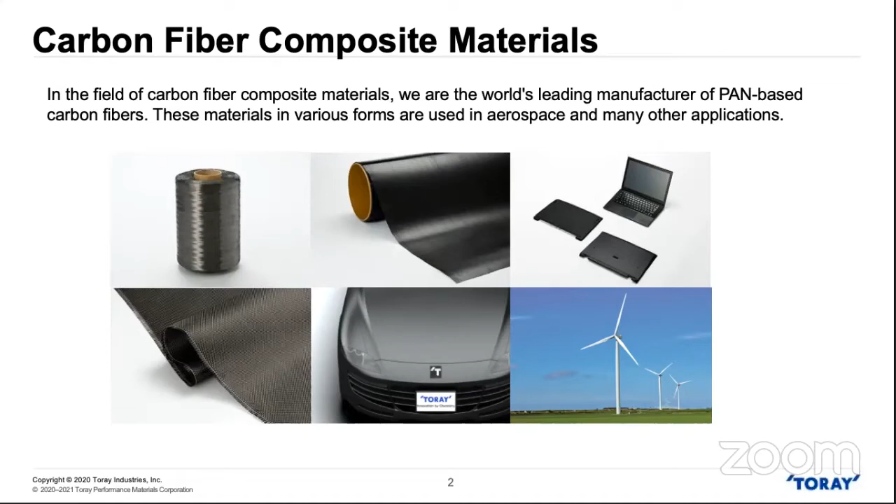So what exactly is carbon fiber in a composite? To understand our materials, we first have to understand this concept. Webster's dictionary has defined a composite as a solid material composed of two or more substances having different physical characteristics, in which each substance retains its identity while contributing desirable properties to the whole.

Composites can be found in many areas of our life: aerospace, athletic equipment, vehicles, motorsports, boats, military, high-end tech, construction, medical, I could go on and on. Composites are used to reduce weight because there's a high strength to weight ratio compared to homogeneous materials. One example would be an aircraft where fuel savings of up to 20% can be achieved with 50% of the aircraft being made from composite materials.

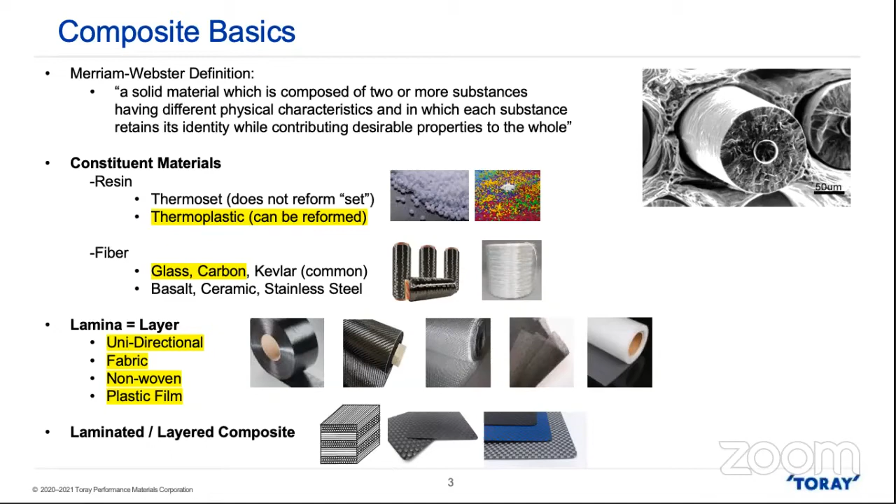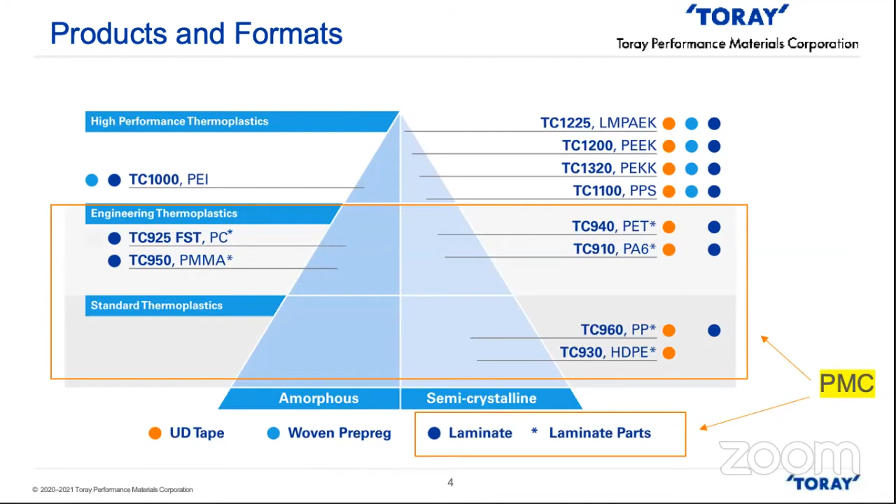When we talk about these engineered thermoplastics, keep in mind we can create a hybrid of materials by combining the woven layers with the UD layers, as the polymers are compatible, while giving the benefit of the UD efficiency, it offers the woven cosmetic so many of our customers desire.

Here's a deeper dive into the polymers our division works with day in and day out. We offer these polymers in a number of carbon and glass options, as well as the hybrid options discussed on the last slide. With both woven carbon fiber and glass and unidirectional carbon fiber and glass, we're able to really blanket the entire world of industrial applications, encroaching upon those more highly engineered projects.

The first one at the very top is the TC910, which is a nylon 6. We use this for battery covers, seat structural reinforcement, and the reinforcement of parts are compatible with typical polymers used, so it's easy to injection over mold for a mechanical bond.

The second one is our TC925, which is a polycarbonate. It's used for fire retardant applications, think of computer electronics industry, aerospace, transportation, where that fire retardancy is highly desirable. Again, these parts are compatible, so they can be used as reinforcement strategically along with injection molding and other compatible polymers.

The TC940 is our PET polymer with carbon and glass, and it's really become our workhorse of late. It's just really the cost to benefit ratio here on that particular polymer and construction.

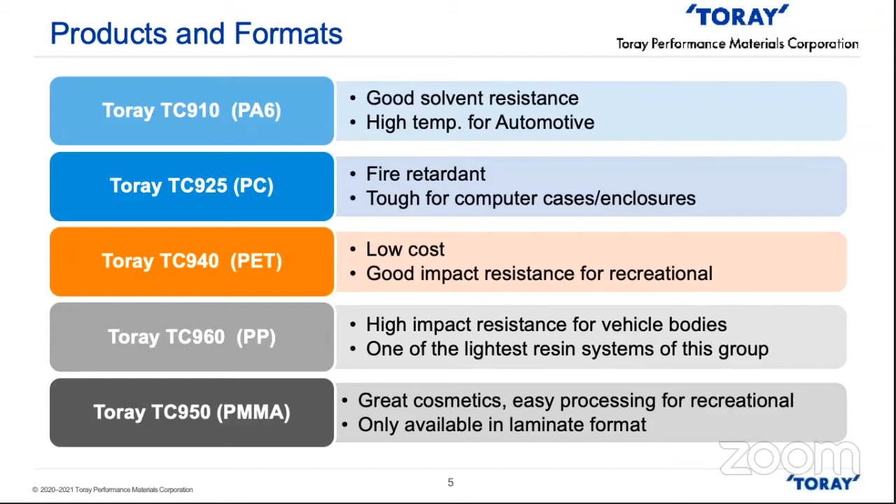Because many of our customers are attempting to replace a part made from injection molding, which may or may not contain fibers or highly laborsome thermoset material, we're often asked about our CFRT materials and how they compare on that cost-for-performance trajectory.

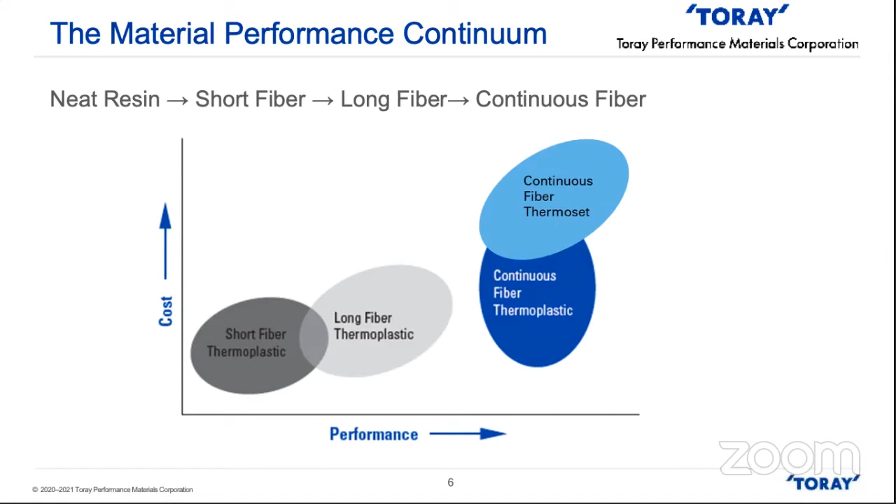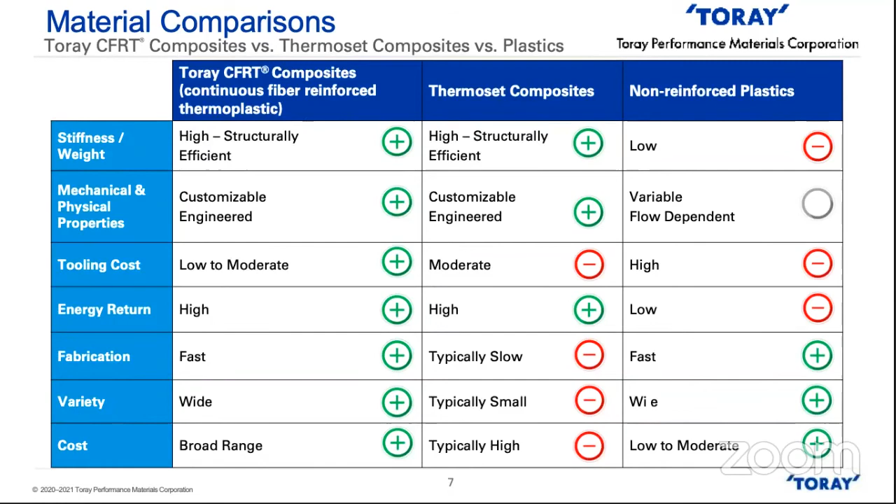So when we sit down with a customer, we have a huge toolbox that we can use, and with this format we can easily guide customers into the material they're most comfortable with. Either it's completely performance driven, or it could be price driven in some of the markets we're in. And for many of them, there is a high level of cosmetic attribute that our customers are very, very concerned with.

All right, so how do we do it? The first step is to make a flat sheet laminate. That's typically how we make most of what we do. Now, we do have other ways of manufacturing that we'll also touch on, but most of what we do starts in a flat sheet. And the reason is because it's so efficient—you don't make millions of pairs per month by making one or two at a time.

So we take that flat sheet and then we cut the parts by 2D with a water jet, and the parts are nested. As you can see, there's very good utilization. And what's left of that panel—behind what this would be like a foot orthotic, that's what's being nested out here, so in the background is what panel's left—we're looking at ways to recycle that skeleton that's left over.

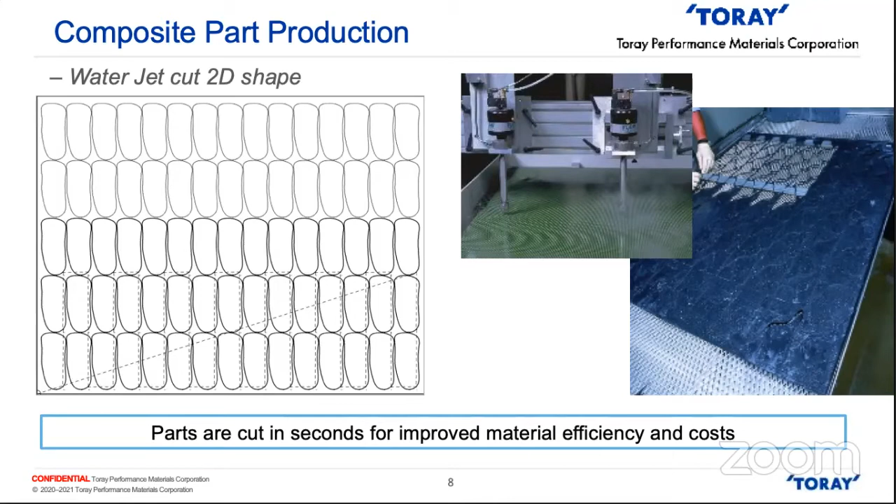All right, so from the water jet, you now have a 2D cut part. And these parts, again, are cut in seconds and literally producing millions per month.

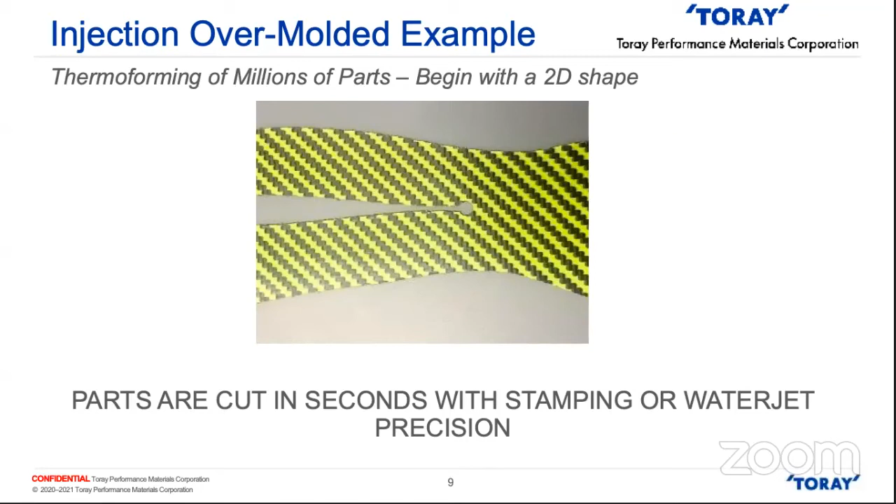Now here's that same part formed—which we formed using vacuum forming. This one happened to be match metal tooling and compression molding. And these parts are formed net in seconds, so there's no post trimming needed.

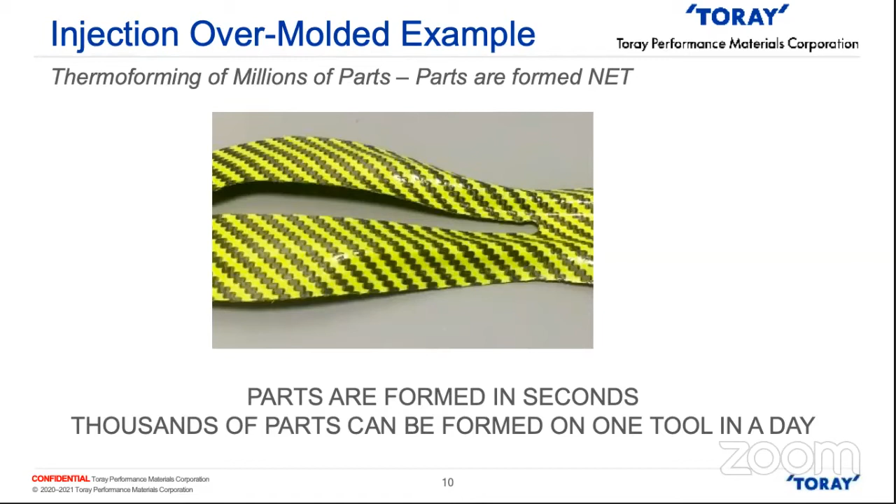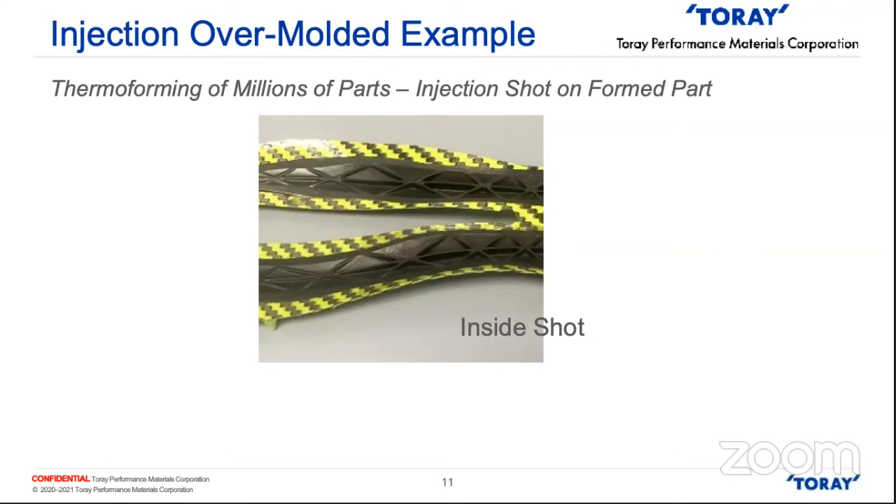So this particular part happened to be used for a product that was going to be injection overmolded. You can see the black there is the first shot on the inside, and the product also has a tie layer. So in this case, you see color—it's our PMMA acrylic resin system—but it has a TPU tie layer that the shot was able to bond without any harmful solvents, cleaners, primers, or adhesives.

And there's the final product there. You can see the final shot's a clear TPU, and it's beautiful.

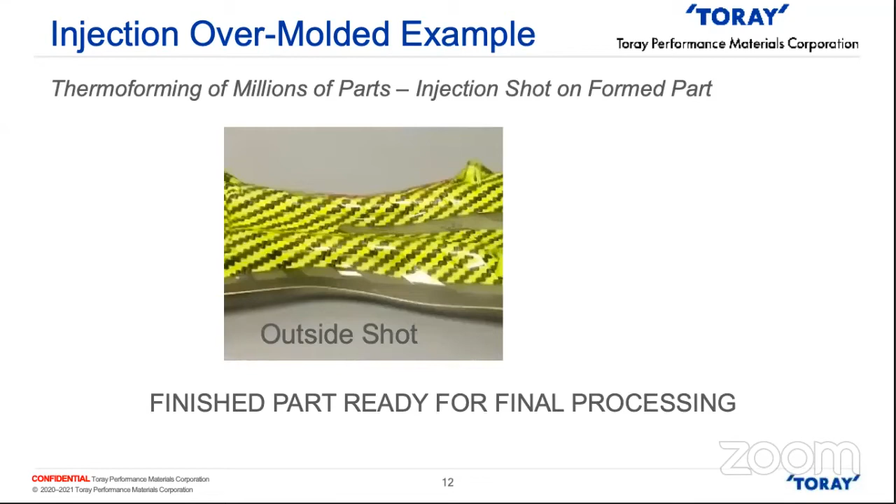Okay, here are a few more examples of our manufacturing. In addition to match metal tooling, which I mentioned, along with compression molding—this is a tape-to-part application. We literally just took our tape, rolled it up in somewhat of a cigar shape, made an X, and through heat and pressure, you see the part at the top right there. Highly defined part, again no post trimming, made to net, and the consistency was incredible.

The way the polymer flowed through heat and pressure—when we did a burn-off, those fibers were oriented almost the same every single time, enough to be within specification. And that bottom toe cap there is very similar; we started with a kit, and through heat and pressure, the part is formed into a toe cap.

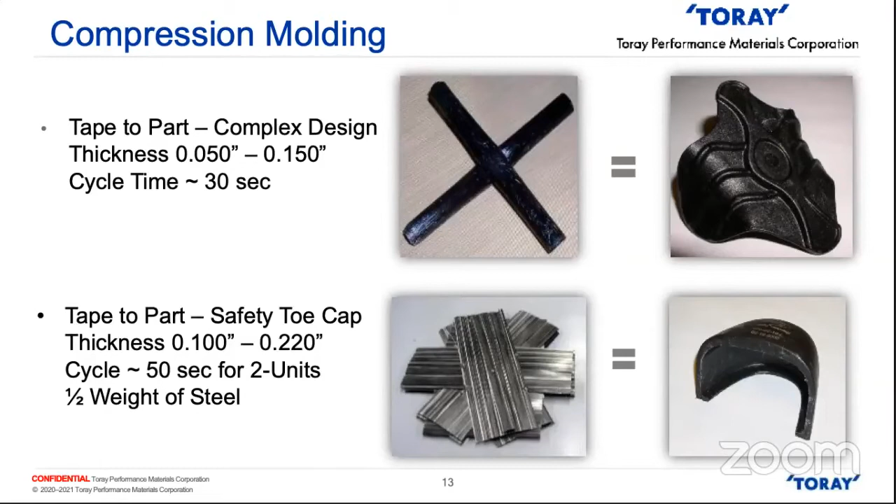Okay, then we get into molding compounds. So again, talking about our skeletons that are left over from water jet, our tape that can be chopped, adding additional polymer—then you can get into a very highly designed part.

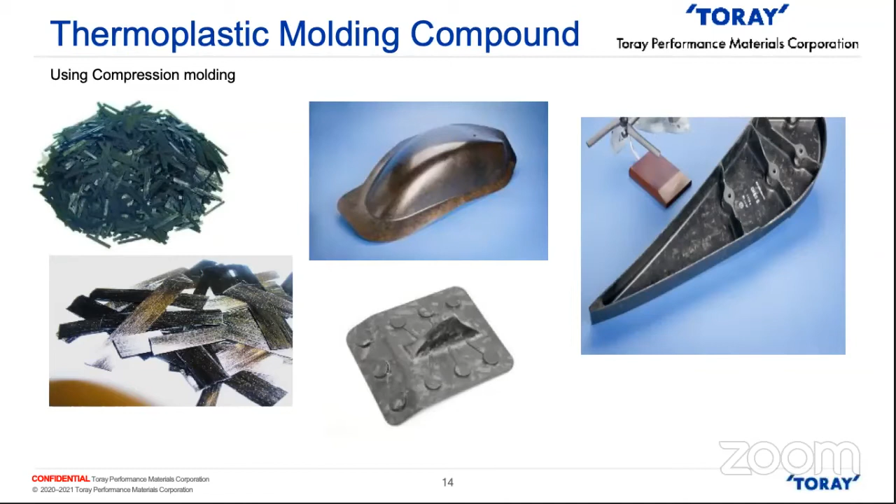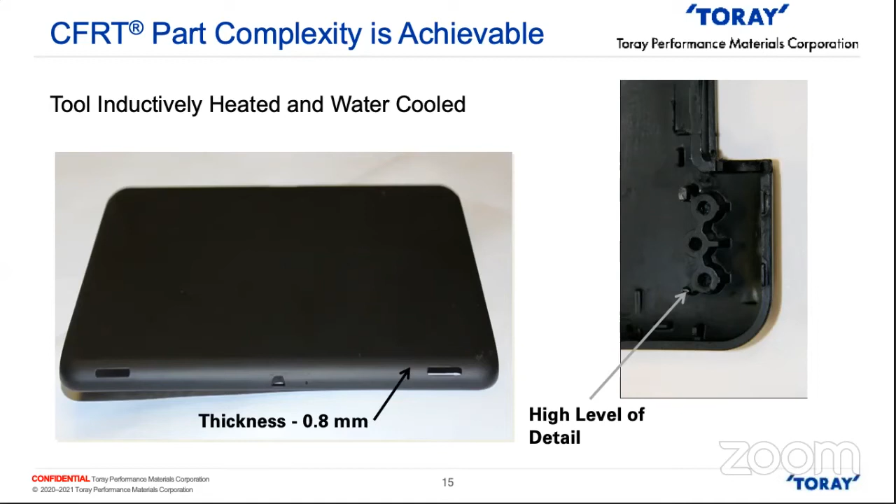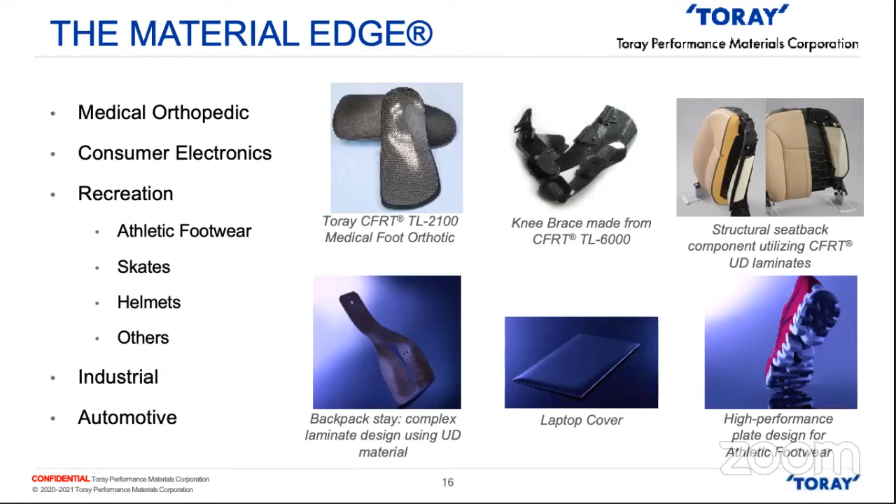So how do we like to work with our customers? This is something we at Toray like to use as an example, because it's something most people can relate to. I don't know how many of you have been in a 787, obviously not lately, but if you were, you'd notice those windows are much larger than historical planes we've flown in. Myself, before I even worked for Toray, before they bought our company—

When you landed, you felt more rested. This was because you were able to gain higher strength, so cabin pressure could be adjusted so the body had less fatigue. The corrosion resistance—now it's made out of plastic and not metal—so the humidity could be adjusted, so when you get off the plane, you don't feel like you've got to drink 10 gallons of water. And the optimized design means it's quieter, able to talk without screaming on the plane.

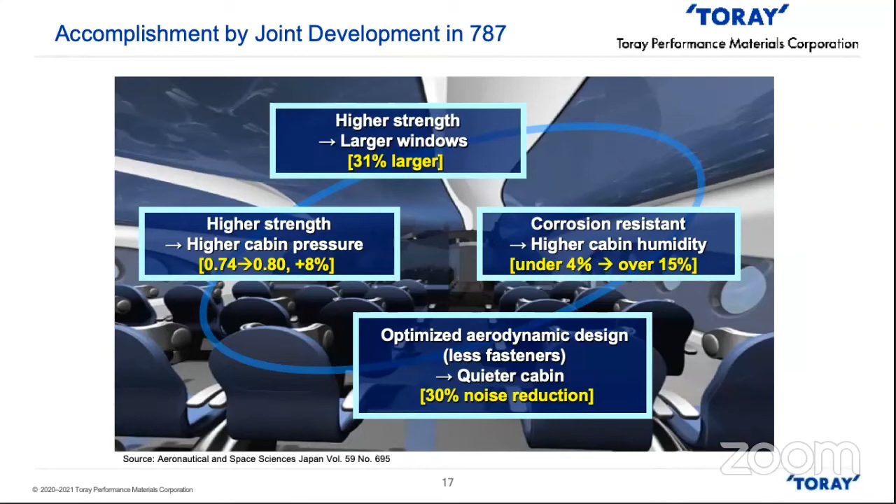So this is just one example of how we work with most customers, developing long-lasting relationships. We dive in deep to your application. Naran has been around the industry for many years, with extensive experience in injection overmolding and how your particular application can be achieved with continuous fiber reinforced thermoplastics, which is different from thermoset or a neat resin. It's really important—when we talk to customers, they'll have a part and want to put a lot of holes in it, or undercuts and different design aspects that aren't normally compatible, but can be adopted into the materials we work with.

This is our global network. Now that we're part of Toray, we are part of a very large organization. Specifically during COVID, we found this so beneficial as we got to learn and meet some of our colleagues in other countries. We never missed a beat, we never shut down. People talk about getting back up to running—we never shut down. Our customers never went without product.

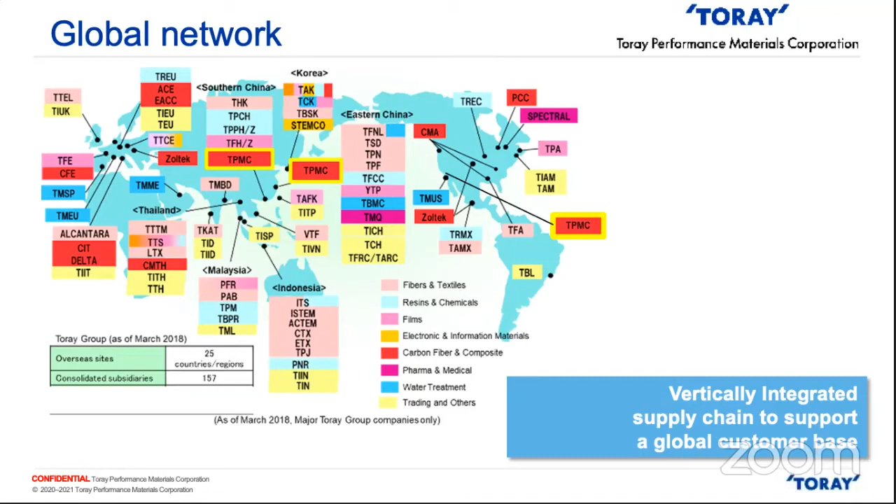You can see the TPMC entities, which I'll call out on this next slide. We work and are set up in locations exactly like our customers. So we have our design presence with customers that are designing at the brands, which could be anywhere in the world. But we have our manufacturing here in California and also in Guangzhou, China. We also have technical offices in Taichung, around the US, and in Europe. So we are everywhere our customers are. We work in that triangulation, able to respond very quickly, and we all work on a 24-hour clock.

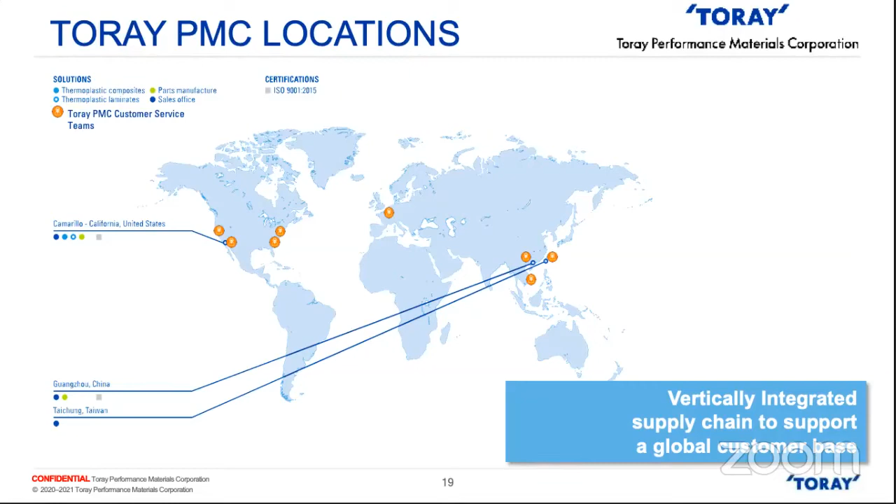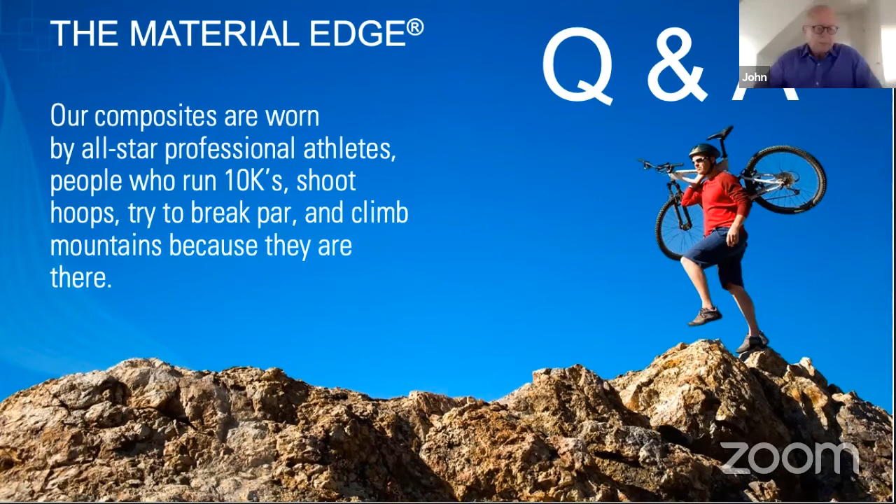Surprisingly, we have no questions as yet, but I have one question. I was wondering, we're seeing that thermoplastics over the past few years are really making inroads now. How much are you seeing that your customers who may well have been using thermosets in the past are trying to move more towards thermoplastic?

Yeah, this is Nuran. I would say it's consistency and high volume. We could make parts essentially at about 7 to 8 seconds a pair, with net attributes—so you're dimensionally net as compared to a thermoset, where you'd typically have to go back and post-trim. That attracts a lot of people into the thermoplastics industry from thermosets, and the cost of manufacture then all of a sudden becomes affordable.

Yeah, and you showed at the end there the 787, which I have been in, and I concur—you do feel more rested, and it is quieter. Do you think we're going to see far more thermoplastics in that sort of use? Rather, I mean what you showed were more sporting goods and things like that. Do you think we're going to go more towards use in aerospace, for that matter?